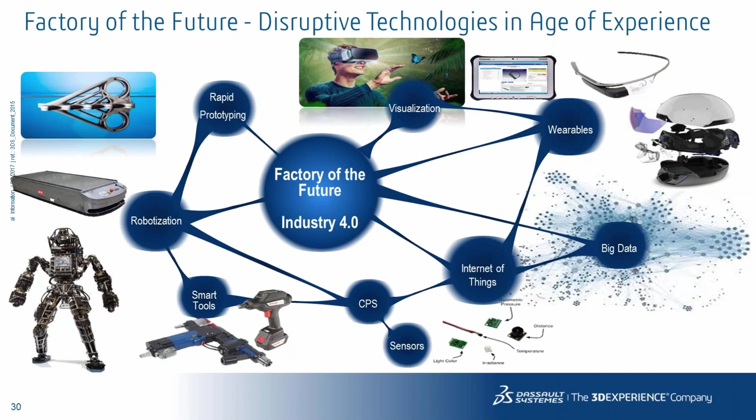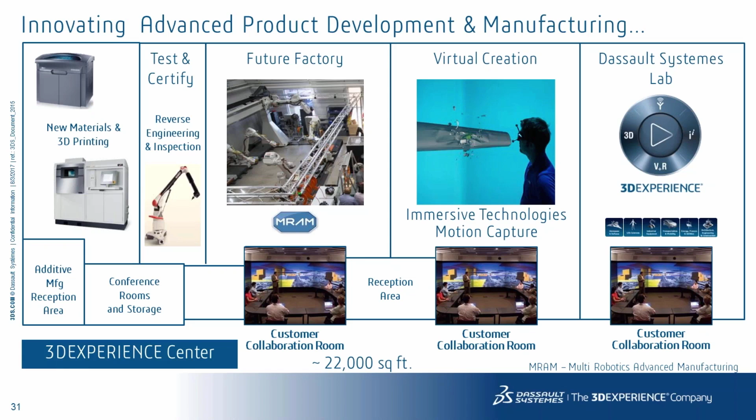And MRAM, and I will get to that in more detail, for multi-robotics advanced manufacturing, to do really flexible, hybrid, automated production, and large capabilities on 3D printing and additive manufacturing. And this is what I want to take and start to give you some more details and do a deep dive on what is out there, what we do, and how it can help you.

So on additive manufacturing, this is a technology which is out there for a long, long time. Think about composites, additive manufacturing, and we learned a lot from that. But now with the 3D printing capabilities, or even if you leverage the design optimization for milling, this is giving you much more benefits in the future when it comes to production and the materials you save, but also in your end products for weight and stiffness and durability.

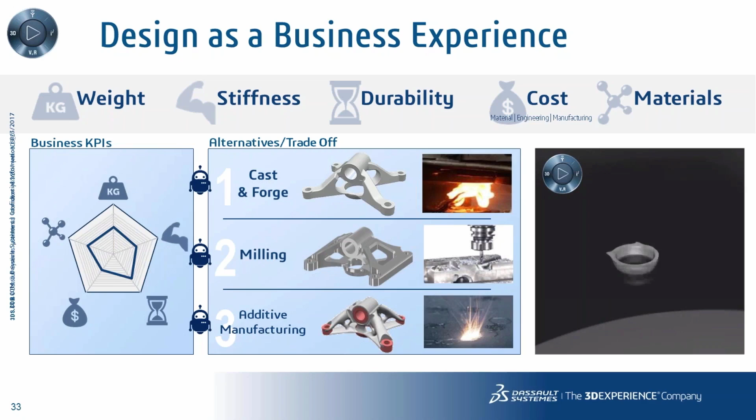As I said multiple times, such a technology of printing parts in different materials is only as perfect as the visibility you have from the beginning to the end of the process underneath it. And the technology starts when you think about the powders and materials you're going to print.

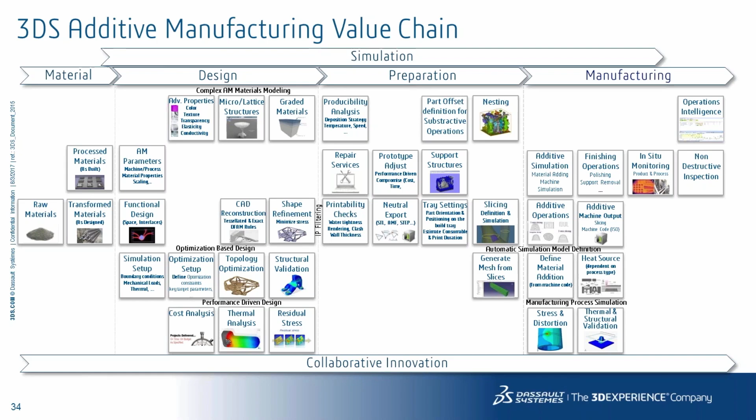You better understand how the materials perform and behave, how on an atomic level it is structured, then you exactly know how to print. There's a lot of focus on the generative design, how to create those parts you could have never designed before manually. Yeah, but it is really the end-to-end process, and this goes from design also to the manufacturing.

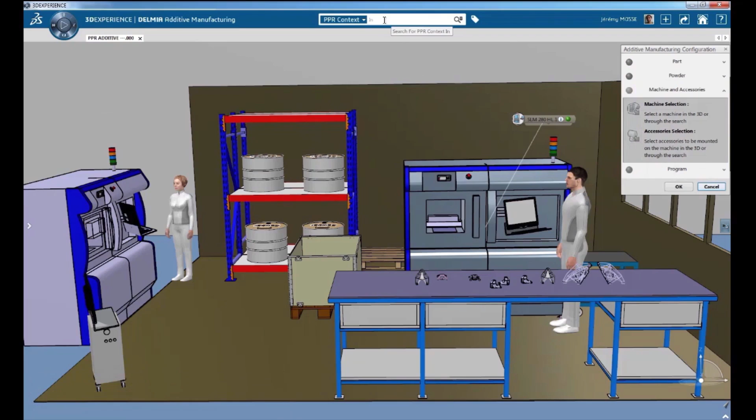And to give you a little bit of an idea, what does it mean to really evaluate not only the design and the structure of a part and the physics behind on the stress, but also looking at the printability, because this is where at the moment there's a lot of waste, that parts which are designed and look just gorgeous cannot be printed. So here in an immersive environment, like you see here, we define the powder, the machines, and with all the parameters of the machine, the tray tables, to then go and validate what is the best strategy and process to print the part.

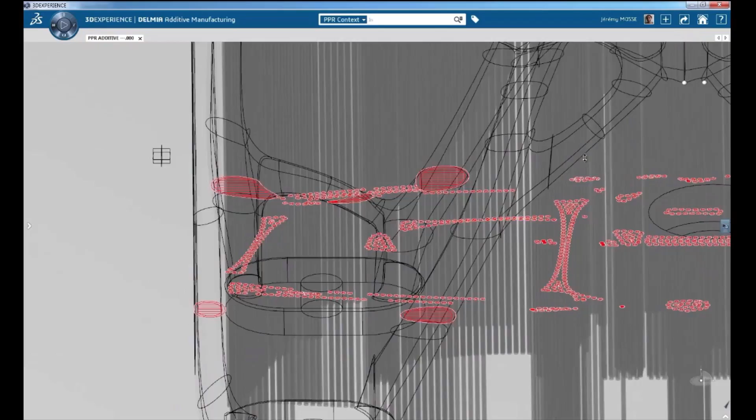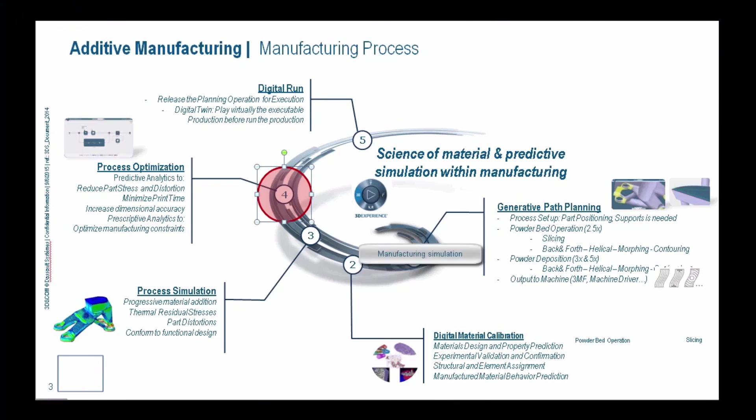Or, at the end, if I figure out I cannot print it, then I have to go back to the design. And this goes through different kinds of process steps, which are common here for aerospace and defense parts, defining the support structures, but also doing the physics and the simulations during the print. Especially when you have complex and larger parts, you want to know how the printed part behaves during print, the impact of heat, the distortion, deformation of the print, to optimize it right here.

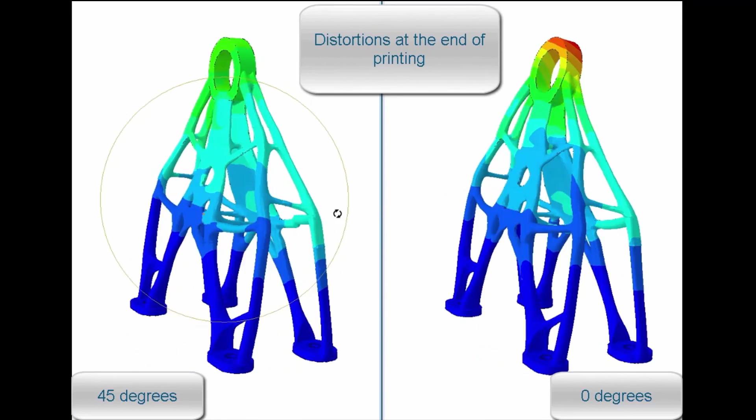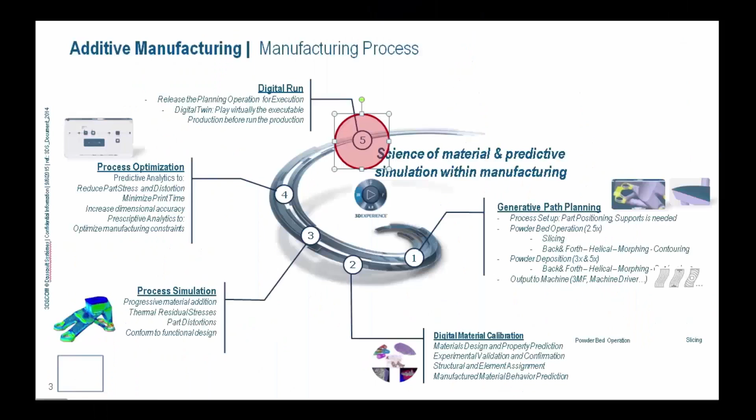Maybe there's a better solution to hit it with a different angle, what we see here. And I want to figure that out in my virtual environment. I don't want to trial and error on a printing machine. This machine is way too expensive, and the material and powder is way too expensive. And I want to leverage automated processes here to continuously run my simulations and the parameters in the background to optimize that 3D print.

So when we look at what we want to drive and the benefits of additive manufacturing, which you can do in the lab, it is really to support getting this technology into rate production, because this makes our aircraft and systems greener, lighter, stronger, and cheaper at the end. And we want to do this rapidly.

Okay, to have the part printed as designed and as the requirements, because then I can certify it and be sure that whatever I design is really coming out at the end, so that the authoritative certification can be done. And then for sure, I want to reduce the time going through the iteration, which goes back to webinar number 1. We talked about the flexibility of changes and implementing them rapidly.

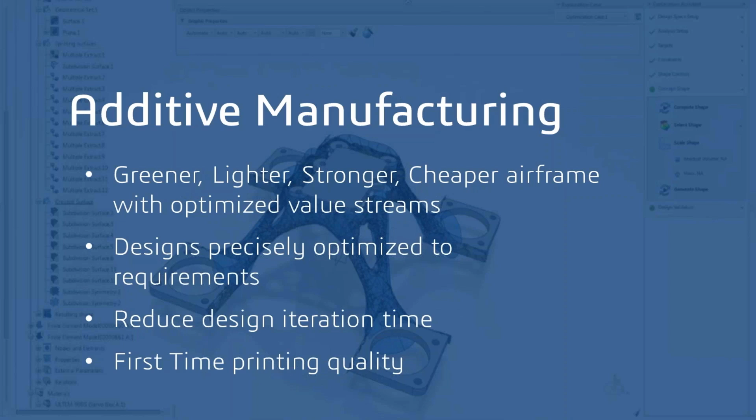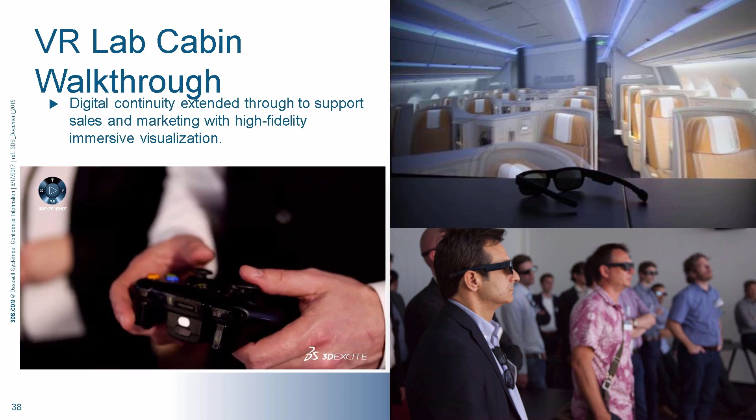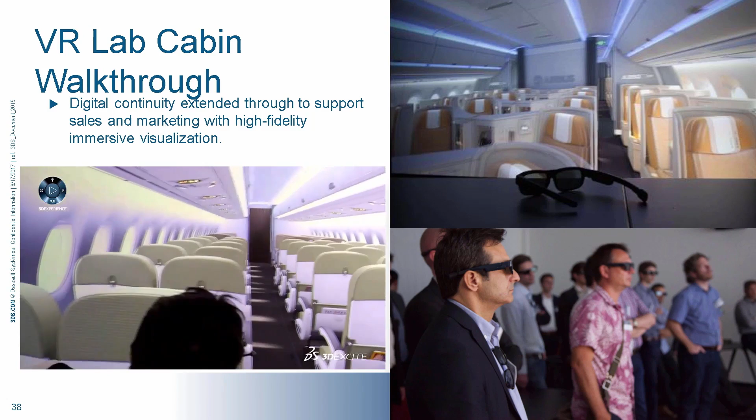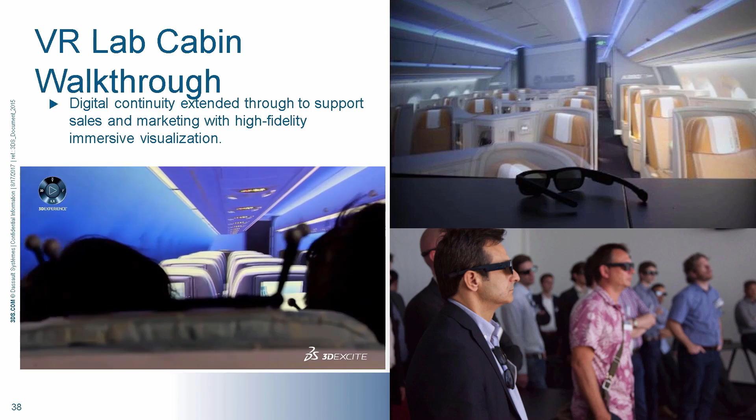Second focus is on immersive engineering and manufacturing systems. This is also technology which has been out there for a while, but it's getting better and better. It's on the virtual reality side with the large caves or power walls. It is really a way to collaborate, review and experience your design in an immersive way, and that's what we see here in this case, to review the design and really experience it, or to do a detailed review. Take your colleagues into the cave, share this experience with other experience centers around the world.

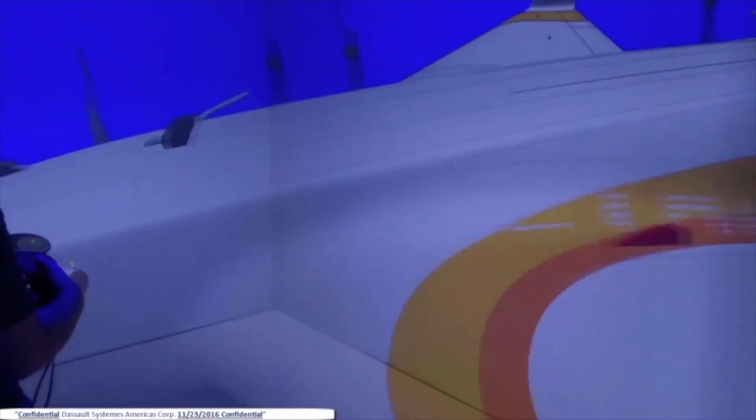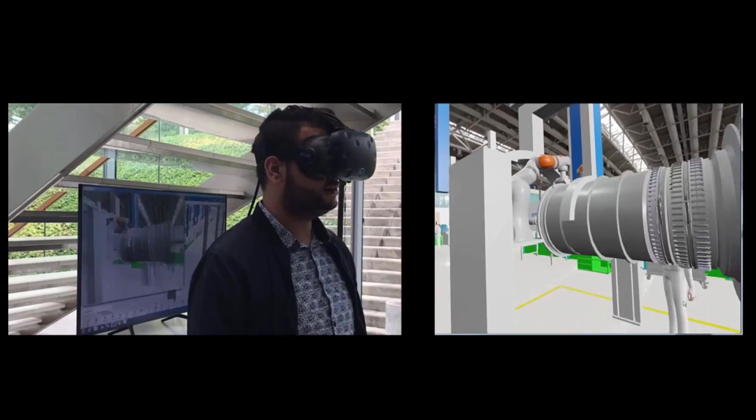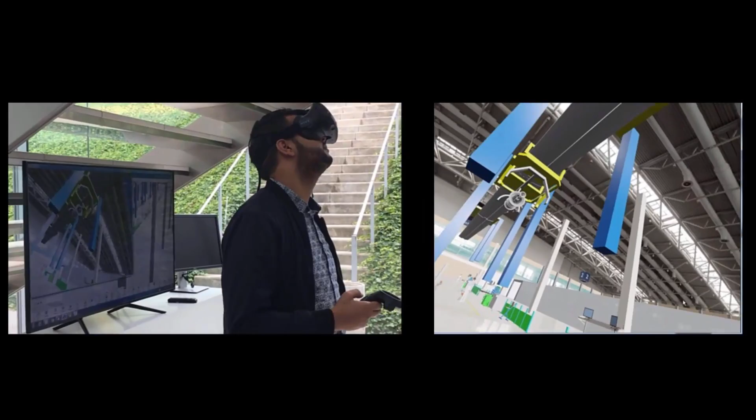You have those power walls or caves in different innovation centers, and then you can do this in immersive technologies, use that to validate what you're really doing, and drive that into manufacturing. And this is when you do the design and the planning and simulation of your production environment. Use those immersive technologies to validate, to review, to get your production people going with you through your factory of the future. See exactly how things are supposed to be, overlay it with how it is at the moment, or build and define your future factory.

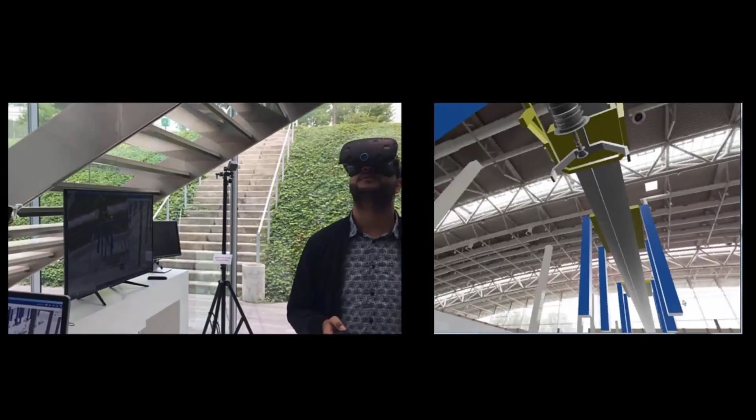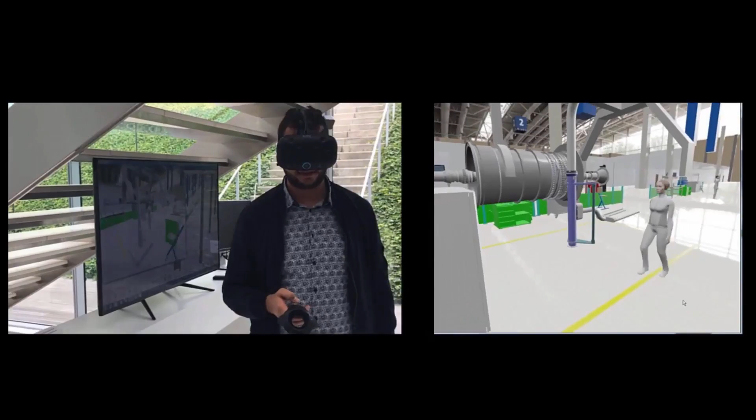So again, this technology is there. It is really meant to accelerate and produce better quality at the end. And this is identifying risk in a virtual environment before I drive it into production, and leveraging all the knowledge on how to implement the requirements and concepts which are proposed, and then take it over into real production.

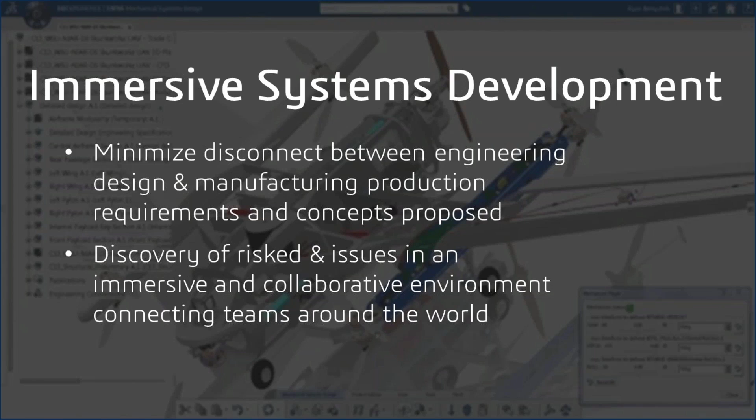But what is key is when we have those flexible production lines for this hybrid manufacturing, that you can program and simulate and validate any kind of change and reset up rapidly. And traditionally, the setup and programming of such robot cells with 6 or 8 robots and different technologies took weeks and months. We want to take it down into a week time frame, that you set up your cell, you define the processes and the robot program, you simulate, verify, and optimize, and then you just send it to your robots and you execute. This is really the target.

And to give you some more perspective on the MRAM cell at NIAR, I would like to show you the following video. With the world's largest multi-robot advanced manufacturing lab here at the 3DEXPERIENCE Center with NIAR, we are not only programming, validating and optimizing the robot cells in a virtual world, we also execute, track the data and analyze the results of the robots to continuously improve the cell performance of this automated line.

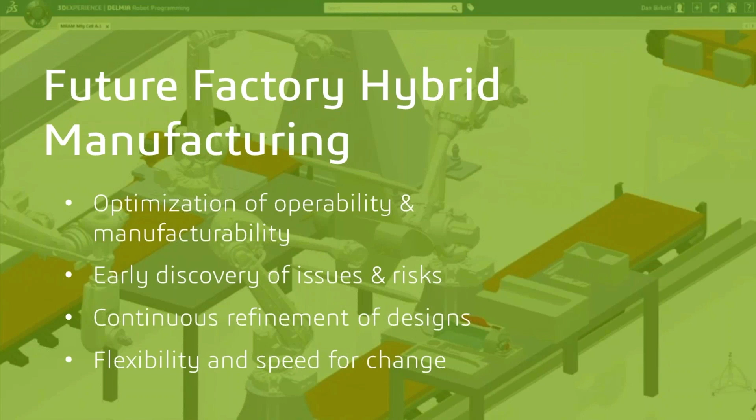Then in the next lab is the virtual and real execution. And the virtual and real execution is showing the digital continuity and the loop from the engineering design, engineering manufacturing, planning to the execution, and then using new technology to loop it back. In this case here, for the drone we developed at NIAR in the Innovation Center. On the left side, you have the digital manufacturing. We do your 3D work instructions.

On the right side, you have the execution system, which you can use as it is on a large screen, on a tablet, to execute the work order. Or you can use new technologies, in that case the HoloLens, which is reading out the work instruction and interacting with the worker, explaining to him how to install it.

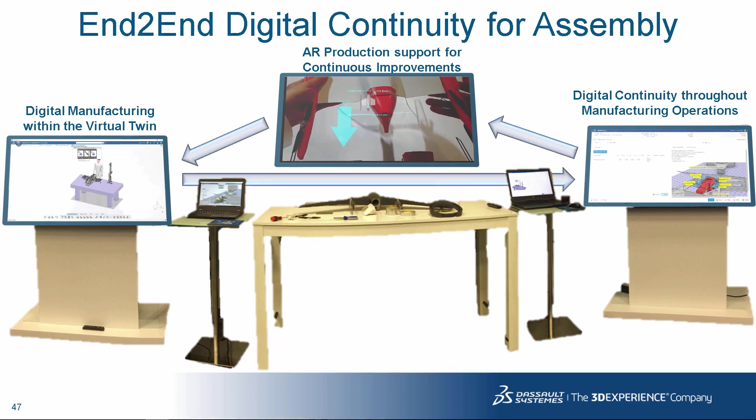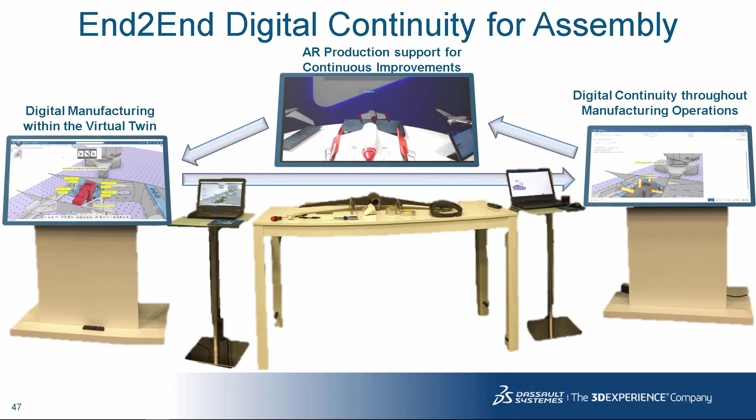And not only how to install it, but also capturing information and data from, in this case, an assembly workplace, which then can be fed back into my virtual environment to optimize my processes, my work instructions, my sequence, and so on. Here again, it focuses on the first-time quality.

It focuses on what kind of technologies I can give my workers at their hand, say smart tools, or at their head. When we think about a HoloLens, to use augmented reality to execute there and to help them be faster, be more precise on the quality, be more efficient, learning from the shop floor, driving this optimization throughout the planning, the simulation, and then the execution.

So I picked those 4 different stations to give you a little bit of an introduction on technologies, but also the processes underneath and behind. All this sits on the 3DEXPERIENCE platform. So you can take your product, your system, your assembly throughout those different labs in a connected manner, to really experience for each of the domains what it means to use new technologies and be innovative in the future. So what can the innovation centers provide to you?

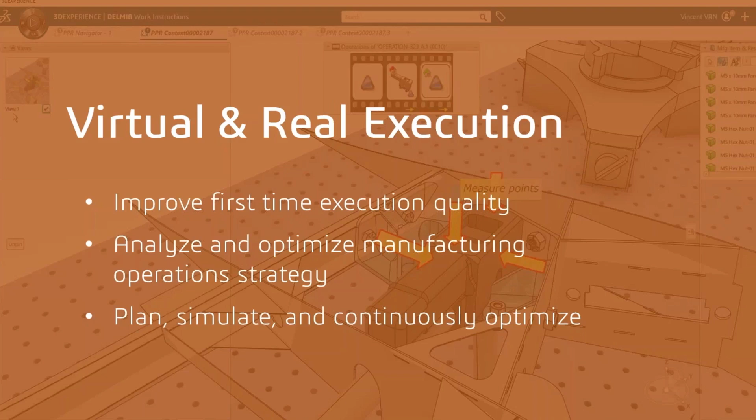On the one hand, you get an introduction to those new technologies out there and how we and partners would recommend using them as a best practice going forward into the factory of the future. But also set up projects with us in different kinds of horizons and discoveries, or take your idea, take a product you think you need to improve in the future, and go through the steps of designing it, planning it, and executing it in the factory of the future.

Really, let's experience that together, and let's make sure that we can help you to be faster, to get it into your real facilities. So as a summary, we want to take you on your journey to the factory of the future and your strategy. And I believe that, for every customer, it is unique in their own way. Then we would like to help and support you at the innovation centers to drive those innovations from an idea, from a vision, to a level where you can put it out of the lab into your production

environment. Also, we encourage all the partners and everybody who is involved, from universities to customers and partners, to be open to network and collaborate. There are so many great ideas out there. There are so many startups who get into that domain and the industry, and we have to leverage them to be faster and smarter in the future.